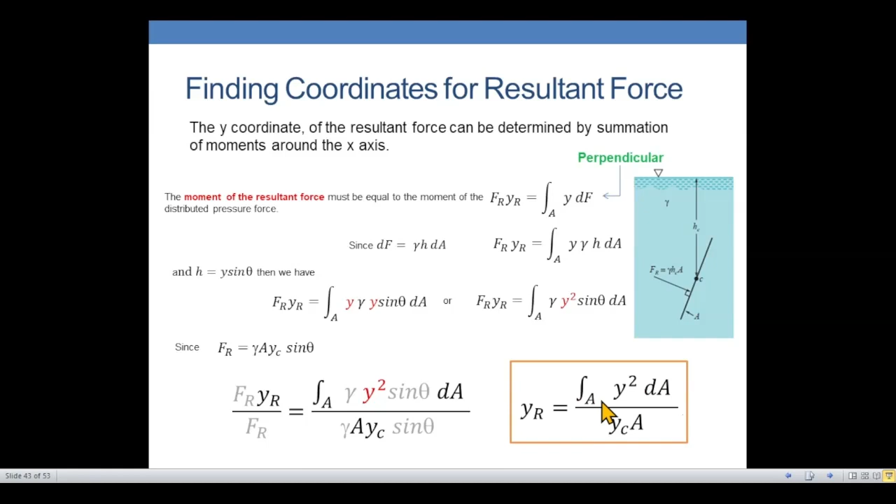Let's proceed. Okay. Now, going back. So ito na yung formula na na-derive natin kanina. Now ngayon, the integral portion of the equation, the integral of y squared dA, is actually referring to the second moment of area, also known as moment of inertia. Or we will write that one as Ix, inertia I.

Okay, so itong integral expression o part ng equation, i-rewrite natin into Ix. Kasi nga, ito daw si moment of inertia. So, we will change the entire expression into Ix. Now, ngayon, the YR is equal to Ix, or the moment of inertia, over YCA. Now, ngayon, kailangan nating i-express si Ix into another form by using the parallel axis theorem.

Now, I don't know if you are familiar with the parallel axis theorem. But maybe as a suggestion, you are going to review kung ano itong parallel axis theorem. The parallel axis theorem is parang doon yan sa part na we are studying the rotating body of solid. So, parallel axis theorem. Since sabi express natin si Ix using the parallel axis theorem, we re-express the Ix into IXC plus AYC squared. So ito na yung expression niya.

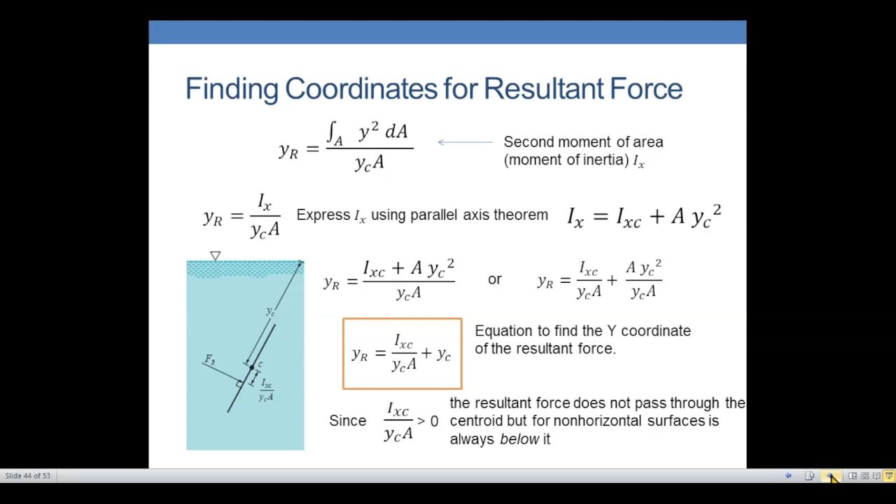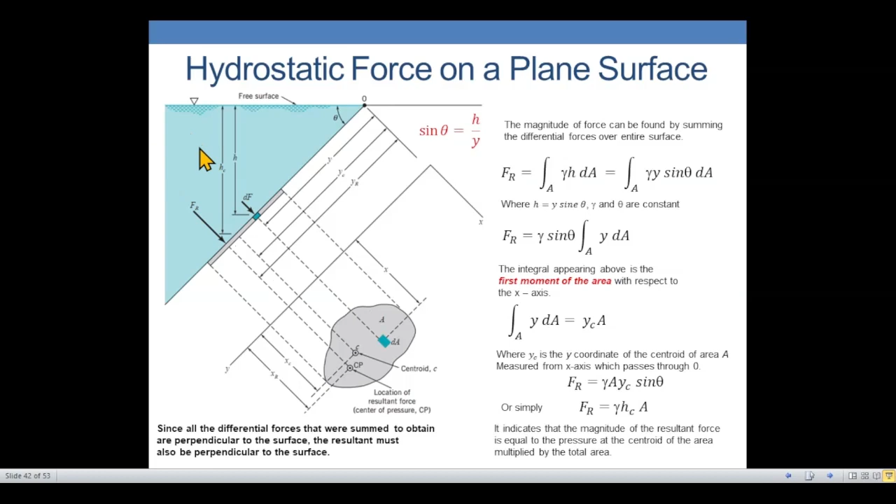Alright. Now, ang hahanapin naman natin is the x coordinate. But before that, babalik tayo doon sa problem. Dito, sabi ko, this is the y. And perpendicular to that is the x. That is why I inserted a simple illustration here to denote the expression. Now, if we're going to determine the x, we could say that the height is equal to sine theta x, or x sine theta.

Okay, so do not be confused with that. Okay, now let's proceed. Now, the x coordinate, or xR, for the resultant force can also be determined in a similar manner by summing up the moments about the y-axis. So finding the x coordinate for the resultant force can be determined in a similar manner by summing the moments about the y-axis.

So, again, kanina ginamit natin yR, ngayon papalitan natin ng xR, kasi nga x coordinate. FR xR is equal to the integral over the entire area of x dF. Then since dF is equal to gamma h dA, we could rewrite this expression into FR xR equals the integral over A of x gamma h dA. Pare-pareho lang din yun kanina.

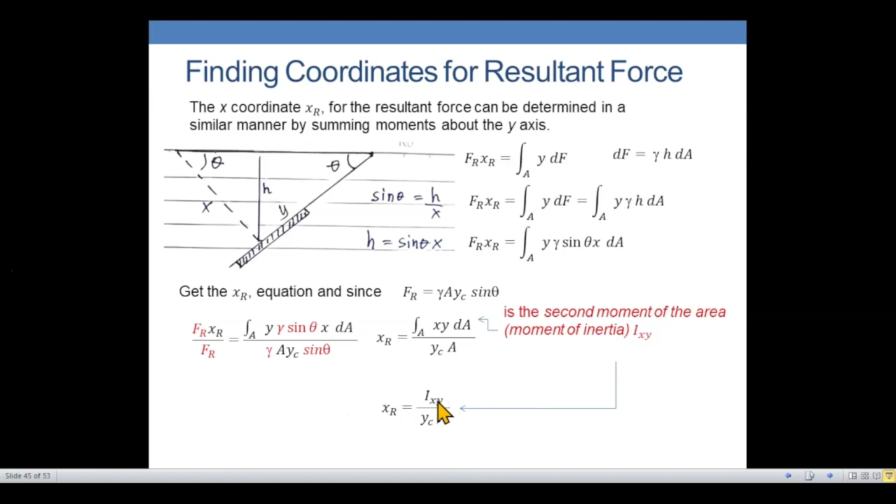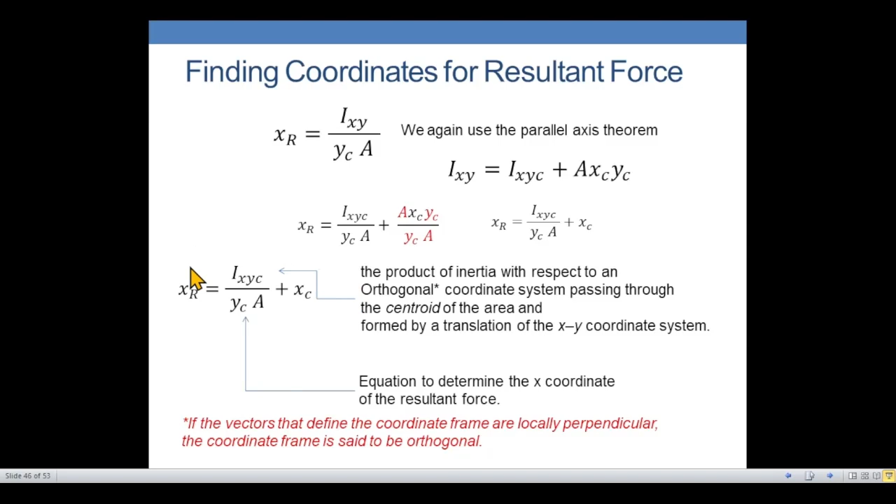IxyC is the product of inertia with respect to an orthogonal coordinate system passing through the centroid of the area and formed by a translation of the xy coordinate system. Masyadong technical, ano? Pag sinabing orthogonal, meaning perpendicular siya. If the vectors that define the coordinate frame are locally perpendicular, the coordinate frame is said to be orthogonal. Hayaan na natin yung mga terminologies as long as alam natin kung paano i-derive ang x coordinate.

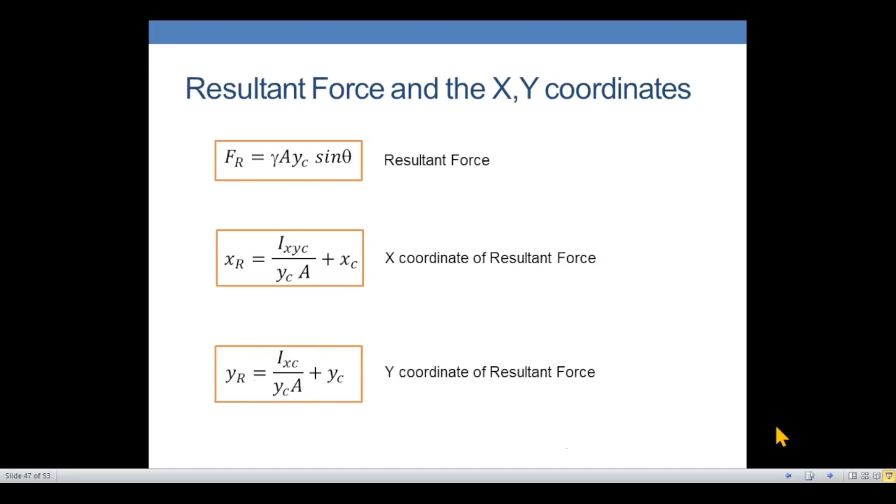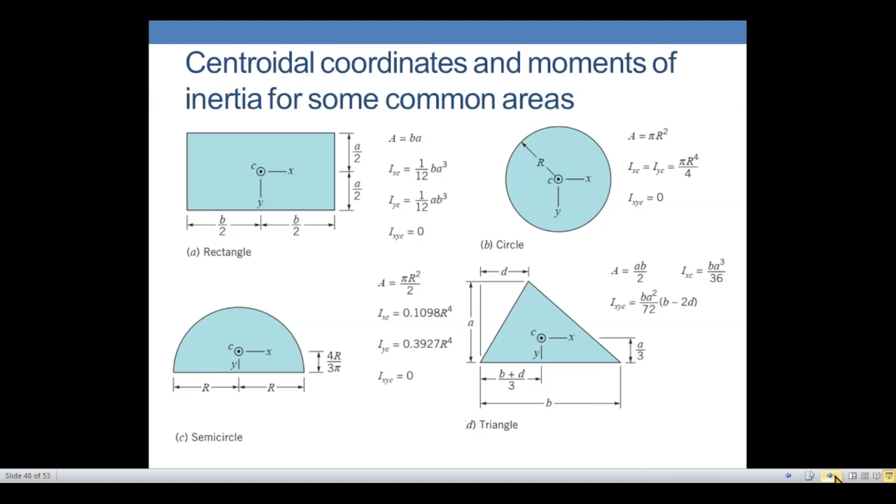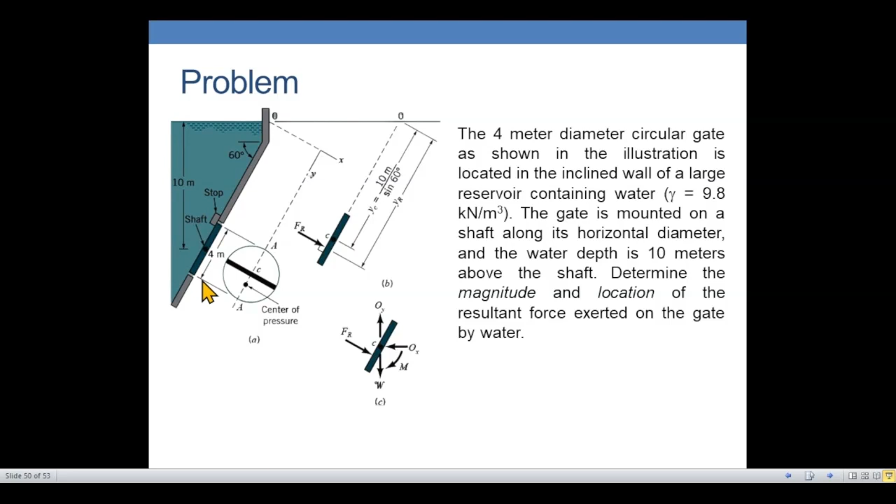Okay, so paano natin i-solve yan? Una, i-identify muna natin yung mga given. Na-mention ng problem statement na meron siyang diameter na 4. Pag sinabing 4 meter yung diameter niya, understood na yung radius, meaning the measurement from the center to the edge of that gate. So the radius is equal to 2 meters. Then kita rin natin dito sa illustration na meron siyang 60 degrees na inclination. So theta is 60 degrees. At saka yung kanyang specific weight is 9.8 kilonewton per cubic meter.

And also nakalimutan kong isulat, the h or the height is 10 meters, meaning from the surface of the water patungo dito sa shaft. So, that is 10 meters daw. So, hanapin natin yung magnitude ng force at saka yung location ng resultant force. Ano-ano yung mga equations na kailangan natin? First, yung area equation ng circle, pi r squared. And the resultant force, the gamma times the hc times A.

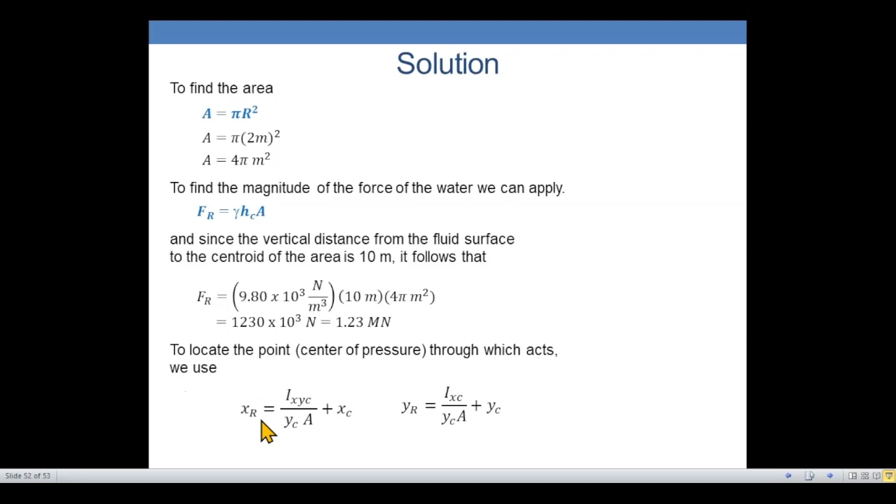Next, we're going to locate kung saan banda ang resultant force. To locate the point or the center of pressure to which it acts, we're going to use these following equations. So for the XR, unahin natin ang XR. It is said that the XR here is equal to 0. As you remember, the Ixyc is equal to 0, and in the solution for XR, meron tayong Ixyc. That is why we will immediately equate the XR to 0.

Since the area is symmetrical, ibig sabihin, the same pa rin ang area dito sa baba. So the XR is 0, and the center of pressure must lie along the diameter A-A. Now, since XR is equal to 0, kukunin na natin si YR, the y coordinate. Kukunin muna natin si Ixc, which is equal to pi r^4 over 4. I-inject na lang natin diretso sa equation: pi over 4 times 2 meters to the power of 4.

And then our yc is 10 meters over sine theta. Bakit siya 10 meters over sine theta? Alamin niyo na lang, check niyo ang illustration. Then the area is 4 pi m squared, plus the yc, which is 10 meters over sine theta. Solve all of these values and we get 0.0866 meters plus 11.55 meters. So our YR is located at 11.6 meters.

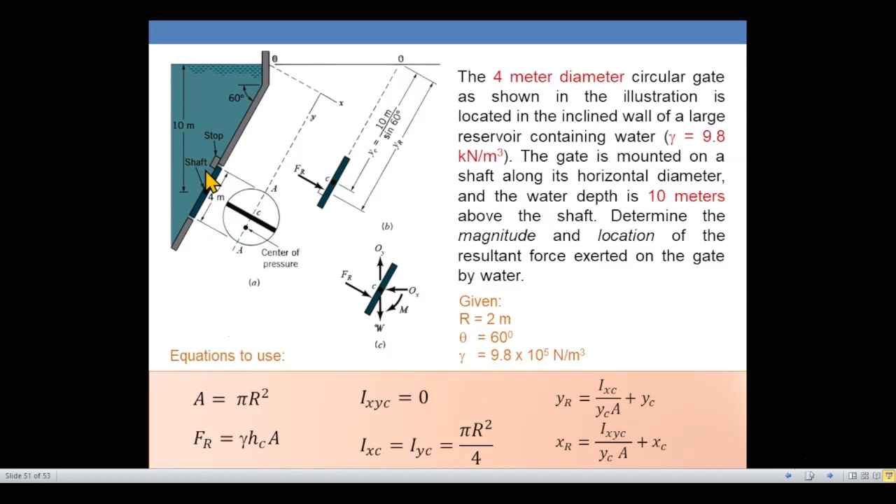Pero pag magme-measure ka galing talaga sa surface ng water going to the resultant force, that is the 11.6 meters, yung YR. Simple, no? Pabalik-balik lang. Hindi na siya mahirap.

So yan ang paraan para malaman natin kung saan mahahanap ang resultant force at kung ano ang magnitude nito. I hope the discussion is clear at nakuha ninyo kung paano i-derive ang mga equations na ginamit natin at paano gamitin to solve the problem. Next, magbibigay ako ng another problem in which I will give you the chance to solve a problem similar with this. So that's all, and thank you very much.